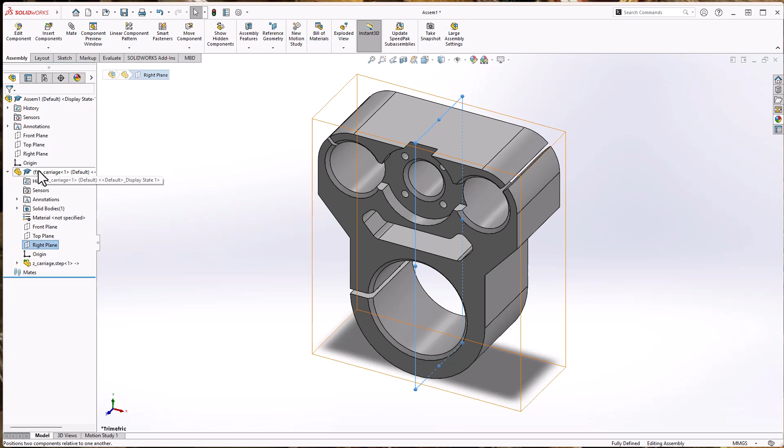So what this does, if you click the check mark, it allows the origin of the part you're placing to line up with the origin of the assembly. I think it's good practice to always do that for the first part that you put in.

When I'm deciding what part I should first put in the assembly, I want the thing that is most stationary or most normal. So now that I have that part put in, notice it also came in as a fixed component - it doesn't move in space. That's good for your first component. After that, we want everything to be related to the first component.

So we're ready to insert something else now. I'm going to use the lead screw nut. We'll bring that next, so I'll click OK. I can drag it and drop it anywhere - this will be fine.

And now that it's here, it's going to go in this pocket. So what I'll do is click this outside surface, holding down Control, I'll click the inside edge here, and I want those two to be concentric.

That looks good, and it went the correct direction. If it didn't, there was another option - I could make it flip around, and one of the other times I insert in, I'll show you how to flip that around.

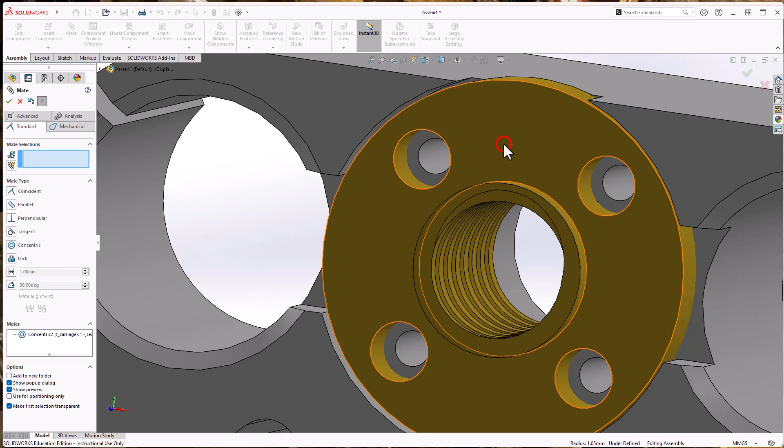Now, if you notice, what I did not do is go into the mate command. The mate command is convenient, so if we open it up, we can do things like choosing the inside cylinder of that hole and the inside cylinder of this hole here, and let the two of those be concentric. I'll click the concentric button and click OK, and that will complete the mate and finish everything out.

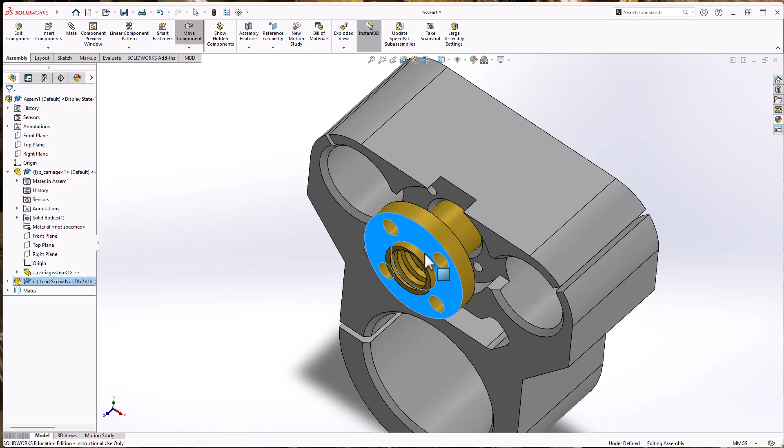And now if you notice here, oops, the lead screw nut is almost all the way locked down. Let's see why it's moving - I'll rotate around a little bit, remember that's the middle mouse button. Okay, the lead screw nut cannot rotate anymore, and it's stuck inside the correct hole, but it's not fixed at that inside edge.

In order to make it fixed, again, instead of going into the mate command, I like to use the pop-ups. So I'll click this surface, and I want this surface, and I'm going to hold down Control, these two surfaces. When I let go of Control, a menu pops up with the basic mates here right in front of me. The one I wanted was coincident.

If I don't move my mouse, I have the option to flip the mate. In this case, I don't want to flip it, but if it ever goes backwards from what you expected, you can click the flip mate alignment and it'll fix it. Okay, this is now fully constrained. I know it's fully constrained because if I try to grab it and move it, it doesn't move. Also, in the design tree, we can see that the lead screw nut does not have a minus sign next to it.

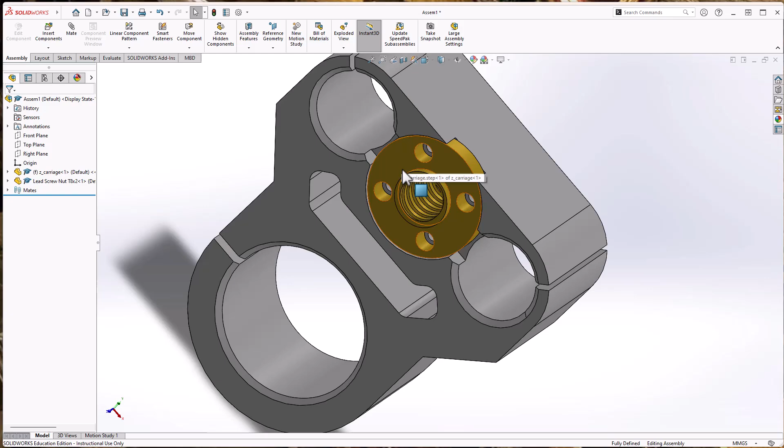That means in the assembly mode that it's fully fixed. Now that we have that component in, the other thing I want to put in here are linear bearings. I'll show you two different ones - I'm including both in your packet. One of them is one I downloaded from McMaster-Carr, called the linear and rotary ball bearing. This looks almost like the one you actually have.

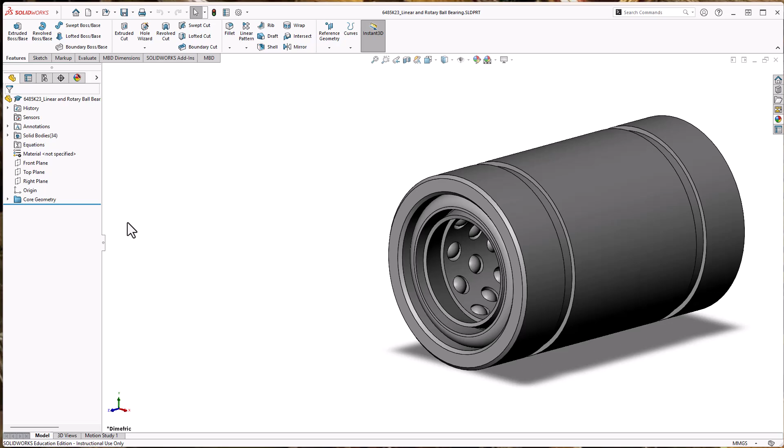Oops, I just clicked to open the part, not to insert it. But I'll show it to you here. You can see it actually has the ball bearings inside of it. This has a lot of detail - if your computer is really capable, it would be fine to use this. But it has a lot of features and is more complicated than necessary, so to keep you from having stability issues, I'm not going to use that one.

I'm actually going to use the other one. So I clicked Insert Part, and now there's one called Linear Bearing. When I open it, it comes in as just a rough representation - notice it does not have the cylinder or ball bearings inside. We want two of these, so I'm going to grab hold of that one.

I'll hit Control. In the design tree, I'll click linear bearing, Control C. Now click somewhere on the screen and Control V, and it places another one. So now I have two in the assembly.

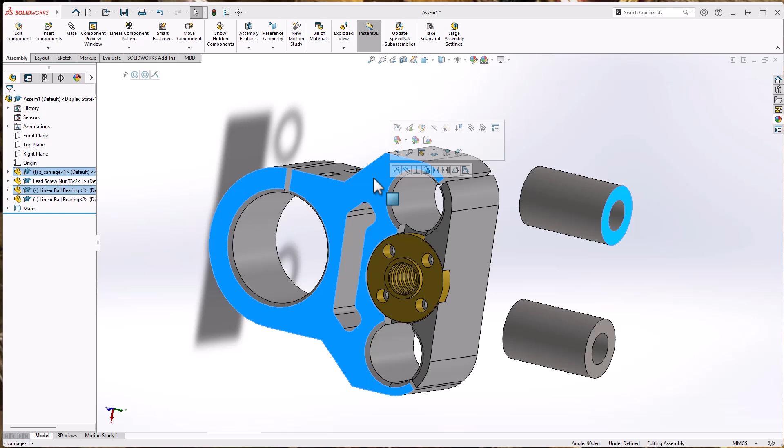I want to do the same thing I did before, inserting these in, but I'll do it slightly differently. This time I'll take this surface, control this surface. When I let go, I have the option to let it be coincident. That's the wrong way, so I'll flip the mate orientation - that's correct, so that's good.

Now the next thing I want to do is a concentric mate, but this time I want to lock the rotation. That means this would no longer be able to revolve in the hole. This one I didn't lock the rotation because I wanted to use the bolt holes to finish locking it, but this one there aren't going to be bolt holes.

So I'll click this outside cylinder, this inside cylinder, let go of control, concentric, and now I need to hold my mouse here and click the lock rotation button. Notice now the linear bearing does not have a minus sign. The linear bearing down below still does because it's not fully constrained.

We'll repeat this process. Click here, control, click here, coincident. It went the wrong way, so flip the orientation. Click anywhere to deselect everything. Outside surface, control, inside surface. When I take my finger off control, I can choose concentric and I'll choose fixed rotation. So now this is fully constrained.

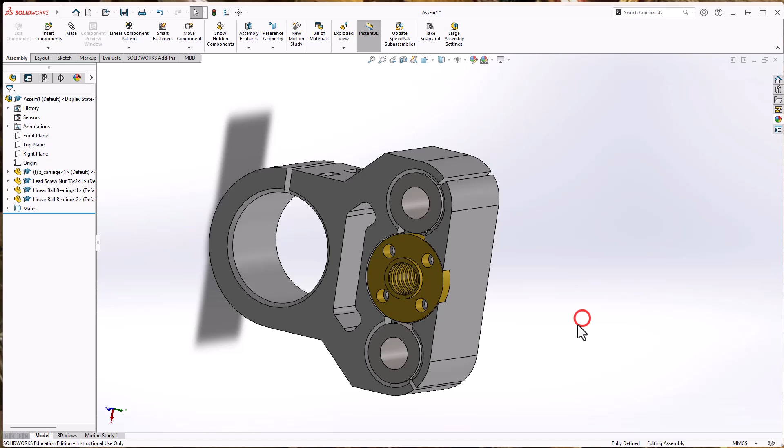So I need to name this assembly. This is all I need to do for this subassembly - this is my Z carriage assembly. I'll click Save, and I'm in the Z carriage components. We'll call this Z carriage assembly.

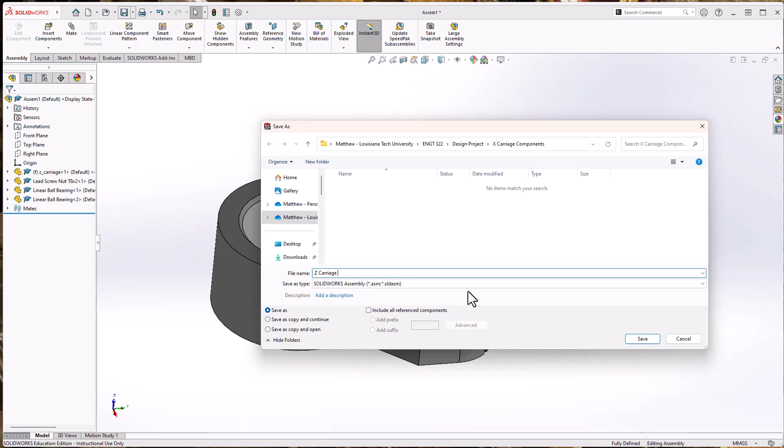One other thing we can do here just to make things look nice. Right now this has been what I would call a bottom-up design, in that I brought in one component, then another, and each of these components are independent from one another.

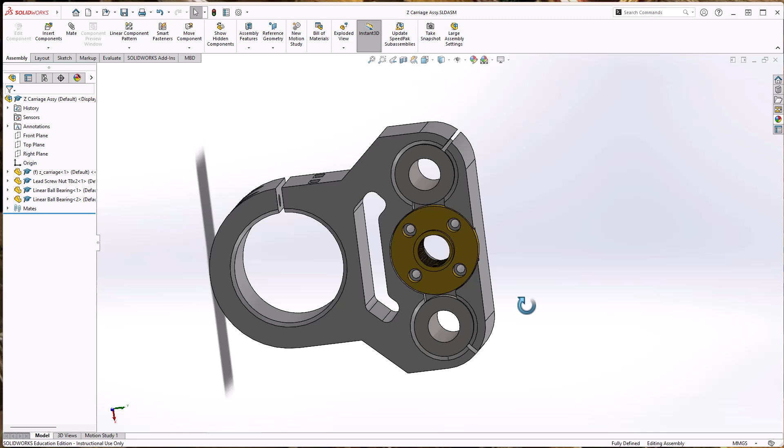In that regard, if there's ever anything I want to edit - for instance, I want to change the color of this Z carriage - if I right-click on it, I have two options: I can open the part, or edit the part within the assembly. I'd recommend, unless you really know what you're doing, to go ahead and open the part independently. It opens up as entirely just the part now. Notice yours should have all the features you needed to create your part - mine only has a step file because I imported this.

So I'm going to go to Appearances. I've already selected some things, so before I started it looked like this - you had just appearances. I'm going to choose the color appearance.

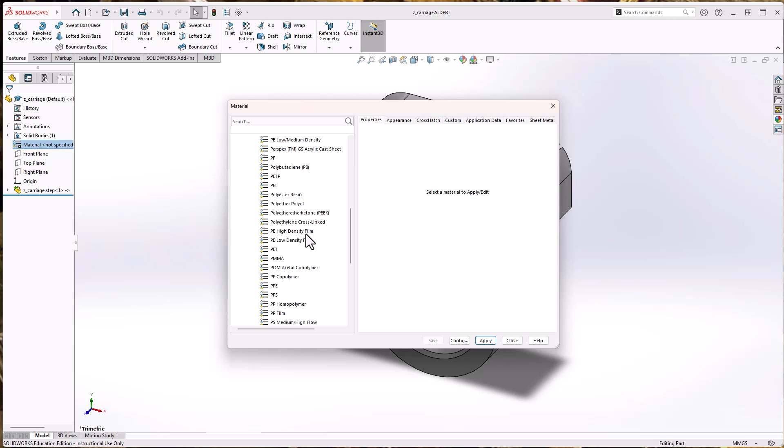I'll choose a plastic appearance. Actually, before I choose this appearance, let me change the material. I'll deselect everything and take a look at the material right here. If I right-click on the material, we can scroll down and see some common ones. There's ABS, I think that's what I'm going to use. I'll call it ABS. I know it's actually PLA, but if I go into Edit Materials and look under the plastics, we'll see that PLA isn't mentioned here at all. So I don't know how precise it is, but we'll call it ABS and click Apply.

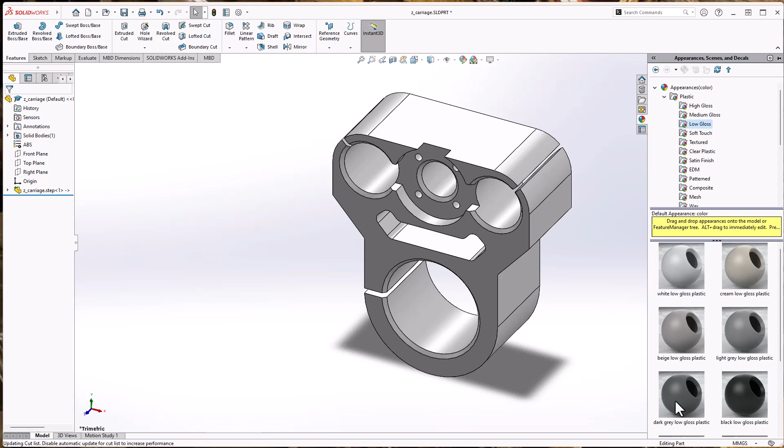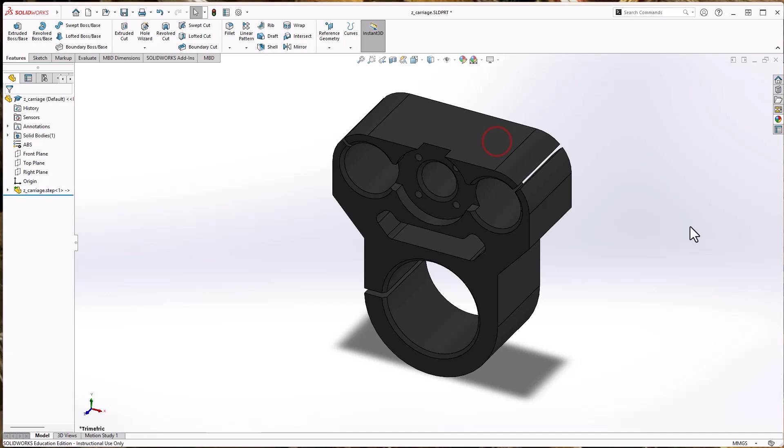Notice the color changed just a little, because there's a color associated with ABS, but I don't want it to be that, I want it black. So I'll click Appearances, go into color or plastic, and now I want it low gloss, and a dark gray. If I pull it to any surface, it'll ask if I want just that surface or that particular feature. For me it's the entire whole body, the single body - if there were multiple bodies you'd choose between one feature or the entire part. I'll do it on the part level, so we'll click here, and now black has been applied.

I'm going to click Save, Control S to save it. I'll exit just this one part, which brings me back into the assembly, and you can see the appearance was conserved, so now it's black here in the assembly. This assembly is finished, I'm going to click Save, and I'll minimize it because we're going to come back to it in a minute.

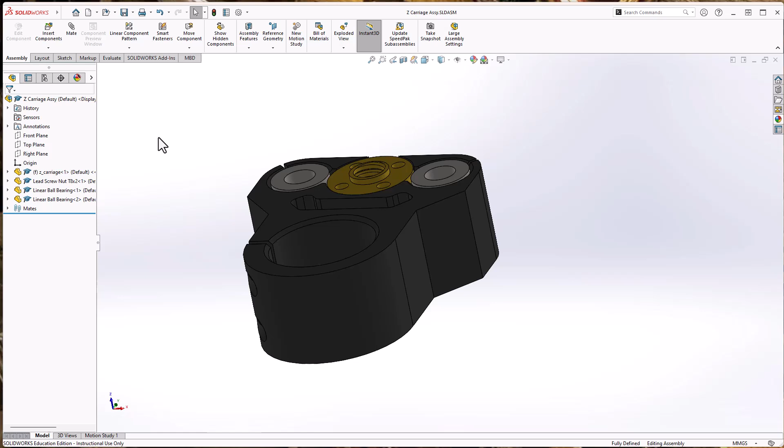The next assembly we want to create is the X carriage. I'm still in this component right now, so let me maximize it back. Here we are in the assembly. I want to go to New, and again if you're in the novice version, you're just going to click Assembly, OK.

Now if you have any files open, they'll show up here already in the Begin Assemblies. I don't have the one I want here, so I'll click Browse. Actually, what I want to insert is the X carriage, but I just remembered I've not yet created the X carriage here, so I don't see it. Let me cancel, we'll exit out of this Begin Assembly dialog and minimize it for a minute.

I'll click Open, and while I'm here, notice the X carriage is a .step file - I've done this for you so you're going to import an actual step file. You click Open, and SOLIDWORKS has to interpret the step file as a SOLIDWORKS file, so it asks if I want to run the diagnosis. That's typically a good idea, so I'll click Yes. It said there were no problems, so do I want to finish the import? I'll click OK, and now it comes in as a single solid body.

At this point I want to save. Notice the file name is now x_carriage.sldprt, so I'll click Save, and it asks if that's really what I want to call it. It is, so I'll click Save again.

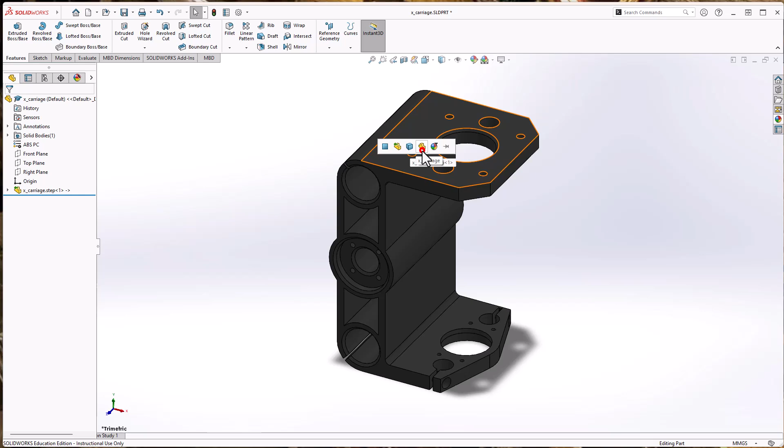We'll do the same thing for the material. Notice ABS is here, so I can choose that, and that made it clear - the PC ABS is a clear material. That's okay, we'll just choose the color here, low gloss gray. I'll drag it to a surface and choose for the whole body, and now I have a black X carriage. I'm going to click Save, and I'll leave it open again, so I'll minimize.

Now if you notice, I've got several things down here at the bottom. Here is the assembly I just started that was unfinished, so I'll click Open, Insert Component. Now the X carriage is what I want to insert, and again I'll click the check mark so the origins line up. Let's take a look at this and make sure we understand what we're looking at.

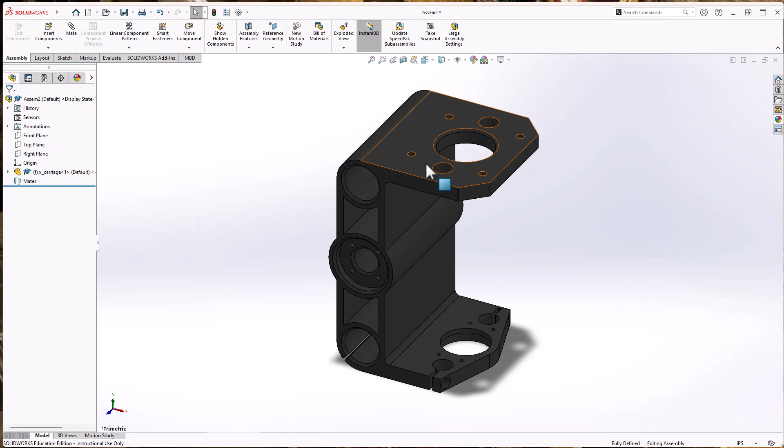It's probably easy to see that we're going to need to put another nut here, and we're going to need to put our linear bearings in those four locations. We also need to put a stepper motor, and that looks like it's going to go here. The stepper motor will stick up and let some other components go, so there's a bearing that's going to go in this area down here in the bottom.

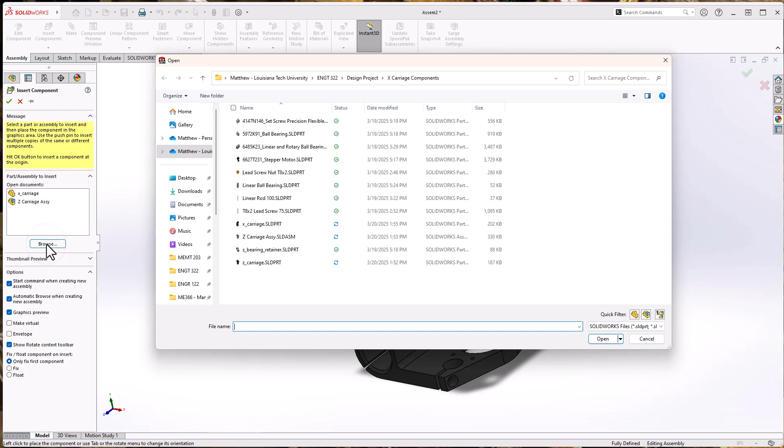It doesn't matter a whole lot what order I do things in, as long as I'm consistent. Since I've already done it once today, let me add that nut again. I'll do Insert Components, Browse. It was the lead screw nut I'm bringing in. I'll click Open, and we'll drop that there, and do it in a little bit different order this time.

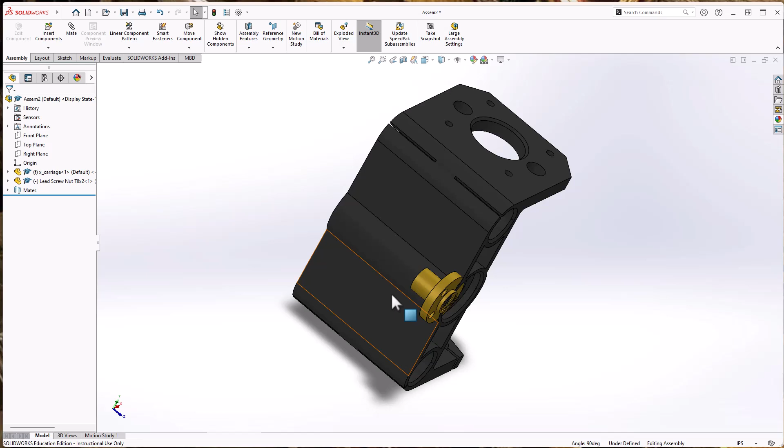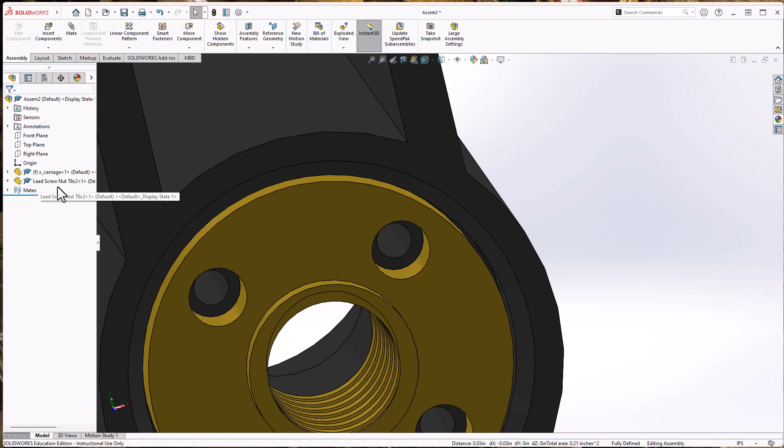I'm going to take that surface, control that surface, let them be coincident with each other. Now I can grab this surface, control inside surface, and let them be concentric, but this time I'm not going to use the lock rotation. I want that cylinder and this cylinder to also be concentric, and that will lock the rotation. The lead screw nut now does not have a minus sign, so it's fully placed.

The next one I want to show you is a different way of inserting components. We'll click Insert Component, then Browse, and use the linear bearing right here. I'll click Open, but instead of just immediately dropping it, I'm going to click the pin to keep visible. By doing that, I can now place 1, 2, 3, 4 in one motion, put them all in at the same time. We'll click OK, and now I just need to go through and do each of these.

Surface, surface, coincident, switch. Surface, control, surface, concentric, lock rotation, and repeat. I took care of those two.

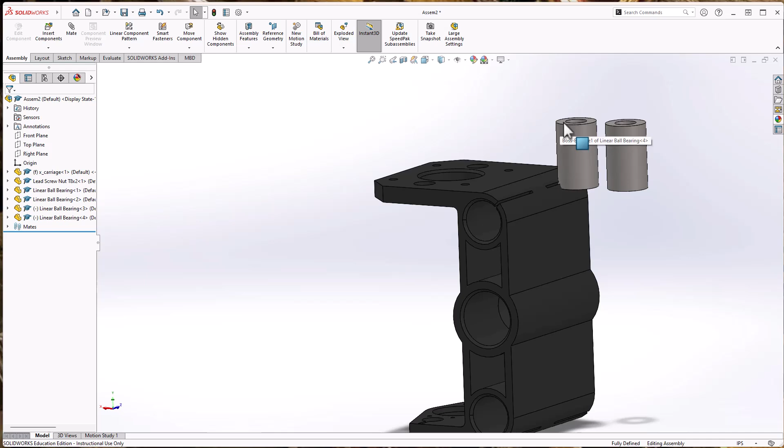Now I'll rotate around so I can see what's going on here at the back side. Notice I was careful not to get the lines. I don't want edges, I want surfaces.

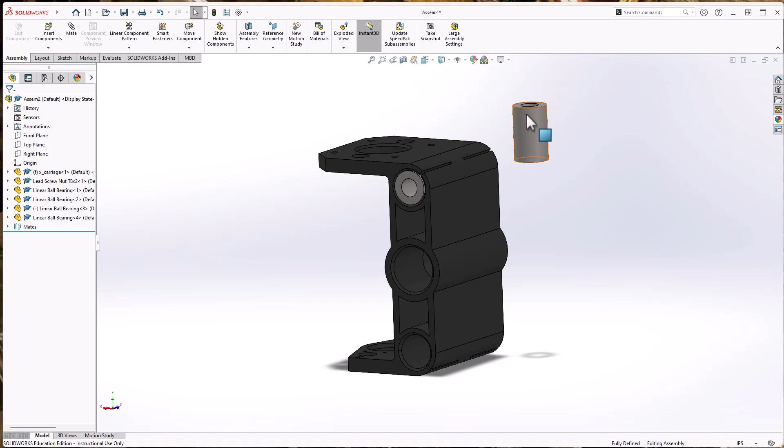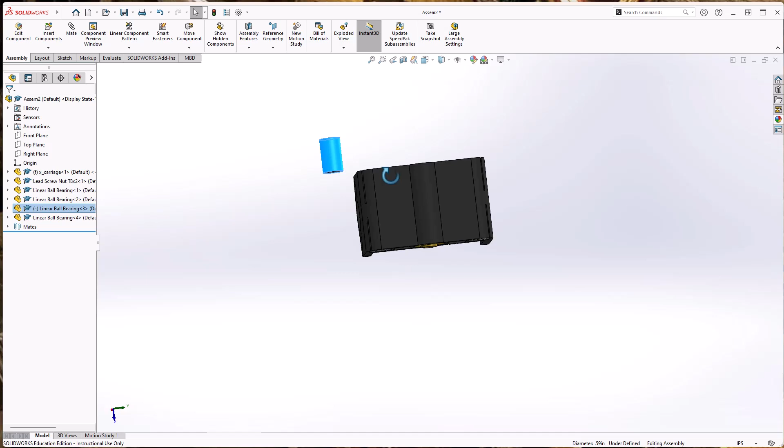Sometimes I will forget to do something, so let me do it incorrectly this time. Let's say I click the surface here, control, click the surface here, and I'll click coincident, but then I'm not going to switch it this time. I'll just click somewhere. I forgot to switch that, so you notice it's mated, but it's in the wrong position. If I drag it and move it, it's still staying in the same plane, but it's the wrong way.

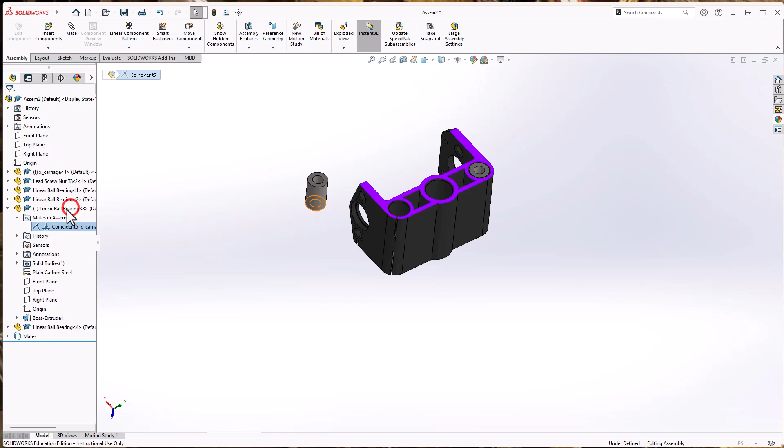I want to flip that mate. What I need to do is first find which one is moving. So this is the component that's moving. Over here we can see it, so I'll expand and look in its mates, find this coincident mate right here, and edit that mate. We'll go into the edit menu. What I wanted to do was make it flip the other way. If you look at the mate alignment here, this is what I currently have where the faces are opposing each other. I want the faces to be the same, so we can go ahead and click it there. That took care of it. We now have it fixed.

The same will also be true for locking the rotation. If I click this surface, control, click this surface, and I'm going to forget to do... actually let me hit escape, so I wanted to get out of the mate command completely. I'll click this surface and concentric. Remember, if I forget to do that lock, all I need to do is go find that concentric mate. I already have it pulled up.

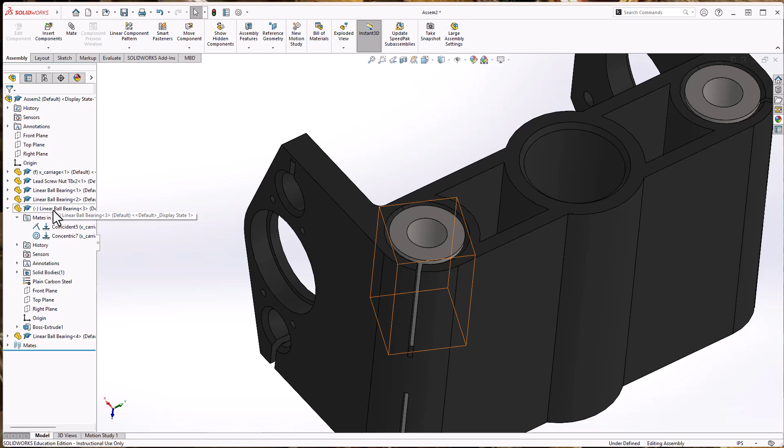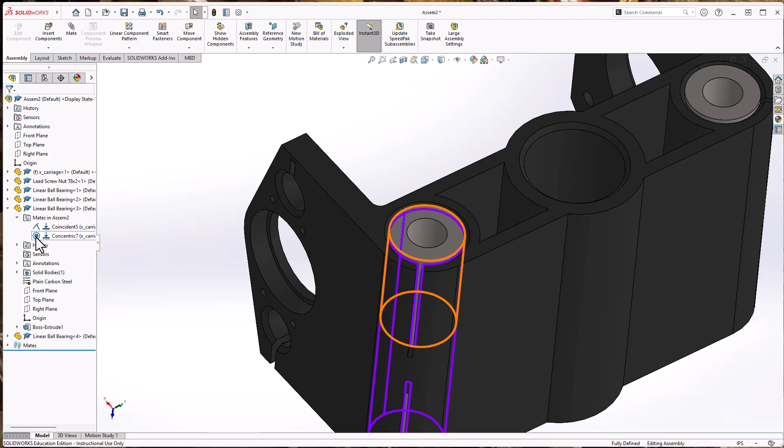There's the linear bearing expanded, and you can see the mate where they're coincident, and underneath it the mate where they're concentric. Notice this does not have a solid filled in inside, meaning we did not lock rotation. If I right click on concentric 7 here, the first option is lock rotation. The symbol changes to where it's bubbled in and the minus sign goes away, and it's now fully constrained.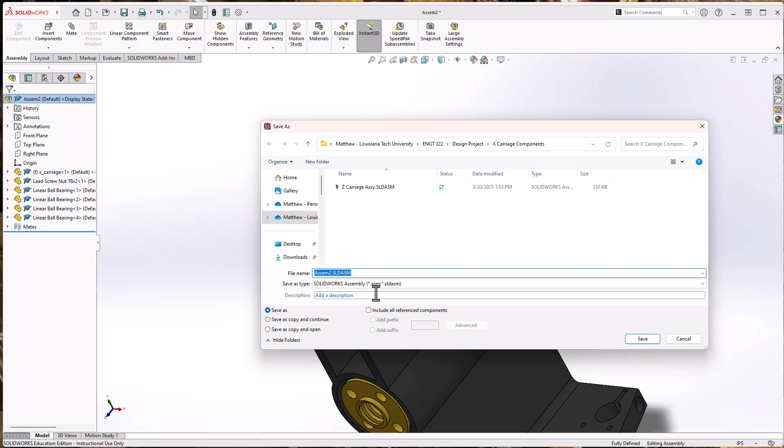So we've got those 4 linear bearings put in, and we also have the lead screw nut placed in there. That looks good. The next thing let's tackle is the stepper motor. I've already saved the stepper motor for you as a SolidWorks part. Let me save — this is probably a good spot to save, and we'll call this X Carriage assembly.

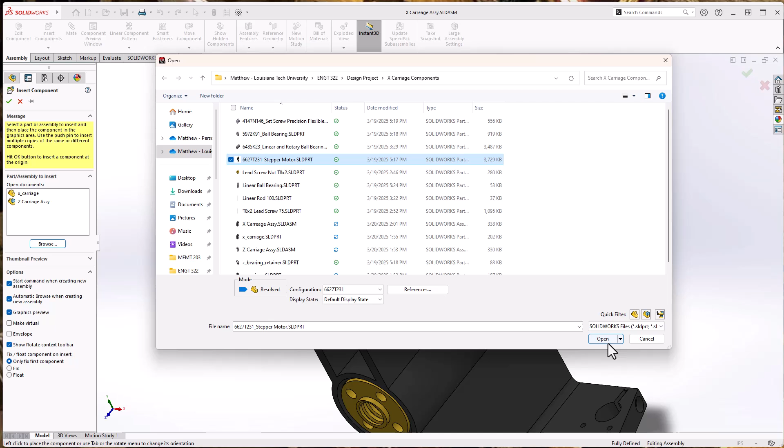We are going to insert components, browse. Let's find our stepper motor. There it is. By the way, all of these that have numbers in front of them were downloaded directly from McMaster-Carr. It's a really good source for getting good CAD files for things that you would purchase. I didn't have to buy the motor from McMaster-Carr in order to get their part to dimension.

Okay, this looks very similar to what we've done before. We'll take this surface here, control this surface, and let the two of those be coincident with one another. And then we'll let this inside cylinder here be concentric with this — I'm hitting control, this inside circle. Oops.

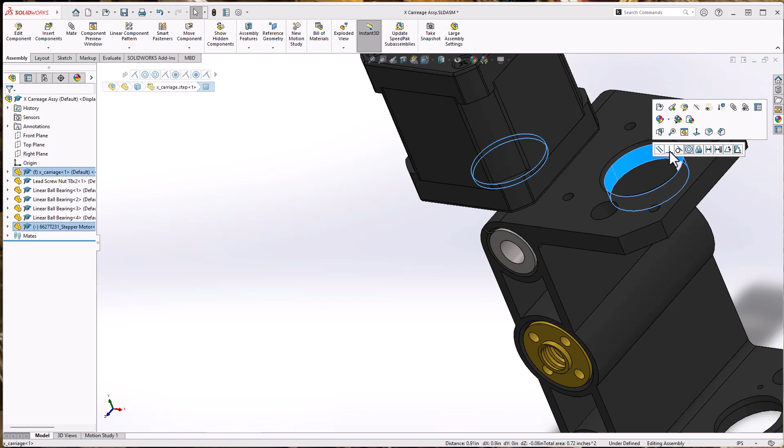Okay, now let me make sure nothing is selected. If I drag the stepper motor, we can drag it all the way around. The way we want it is for the wires to be in the back. So I'll take this surface, holding control, and this surface, and we'll use the perpendicular mate to make them line up.

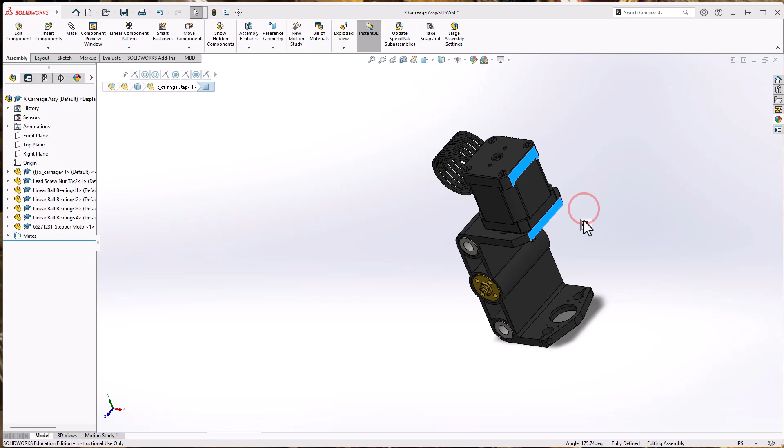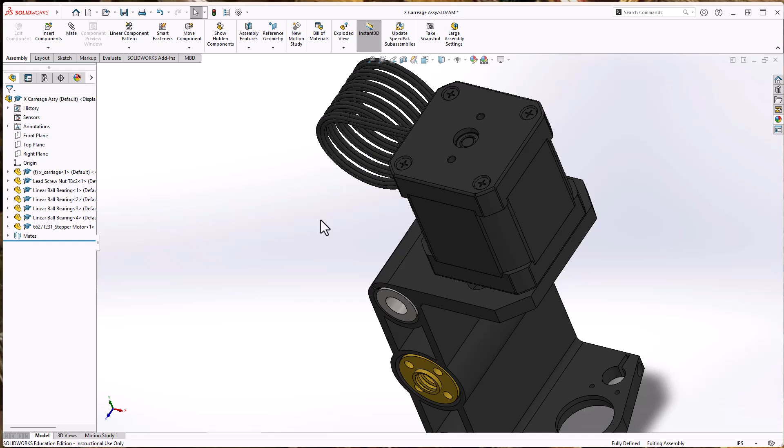That fully mates it. Now, although the stepper motor is actually an assembly, and you can see little bolt pieces, screws, and things like that, SolidWorks views it as a single part because that's how it came in. So there's no assembly components to it, which means this motor shaft is not capable of spinning.

The next thing I want to do is put the coupler on the shaft, but we need to leave a degree of freedom so the coupler can still rotate about the shaft. So I'm going to go to Insert Components, Browse.

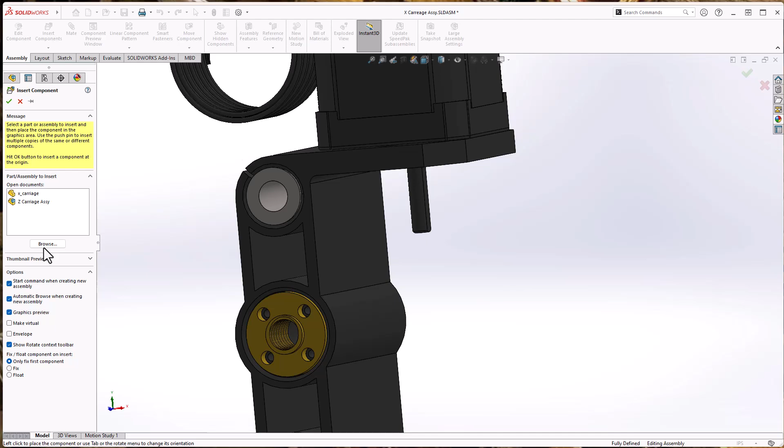This one right here is not fully visible, so we'll drag it out so you can see it. This is the flexible coupling, flexible shaft coupling, SolidWorks part. We'll open it. This one's made out of aluminum, so it's already modeled as an aluminum component. I'll drop it in here in space.

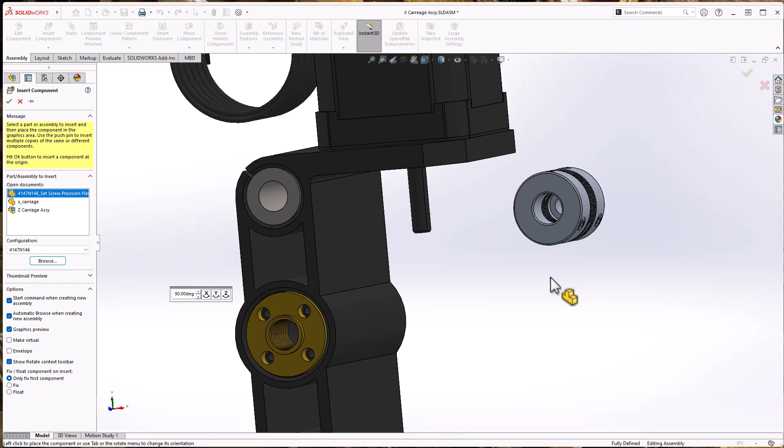You can see that the diameters are different on the two edges. That's because one of them is for the shaft and the other is for the lead screw that we'll put in just a minute. Let's go ahead and get this one assembled where we want.

I think what I want to do is assume that we're going to put the lead screw in - this entire component here will fit, that narrower section will fit on the shaft.

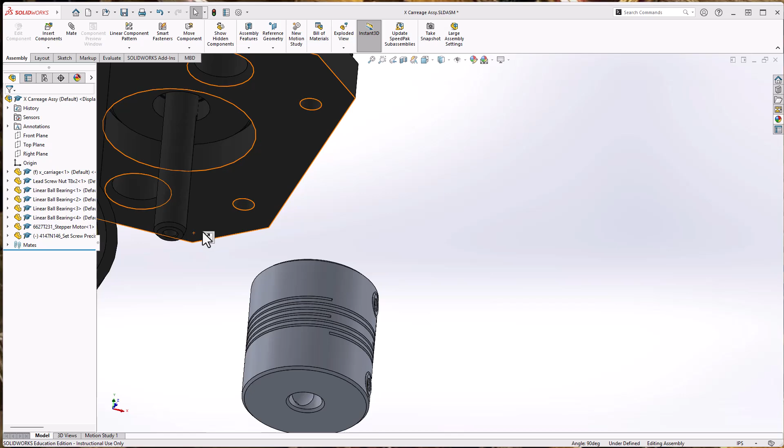So I can take that face right there, holding control, and let it be coincident with this face here. We'll let those be coincident. That's the wrong way, so we'll flip it. That's the right way.

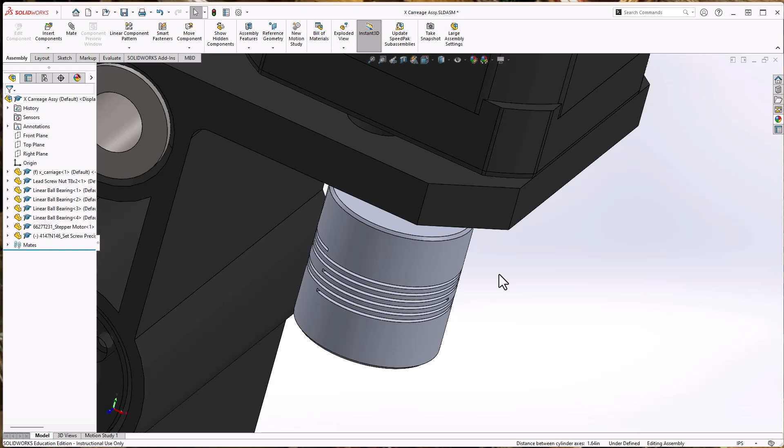Now we can take this inside cylinder and this cylinder face here and let them be concentric. And now I'm not going to choose to lock the rotation, because I actually want this shaft to be able to rotate. So if we grab hold of it, we can move it around. That's what we want, one degree of freedom.

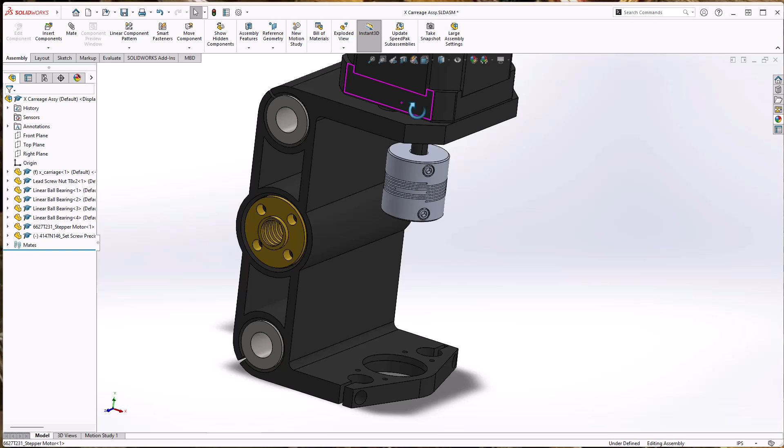Okay, good, that finishes putting that component in for now. We will eventually get to where we are controlling that motion, but for now we'll let it move. Let's go ahead and insert another component.

This time I'll get the lead screw. We've got the lead screw nut, so now I need the lead screw. It's a T8 by 2 lead screw, 75 millimeters long. So I'll click Open. This brings in that threaded rod.

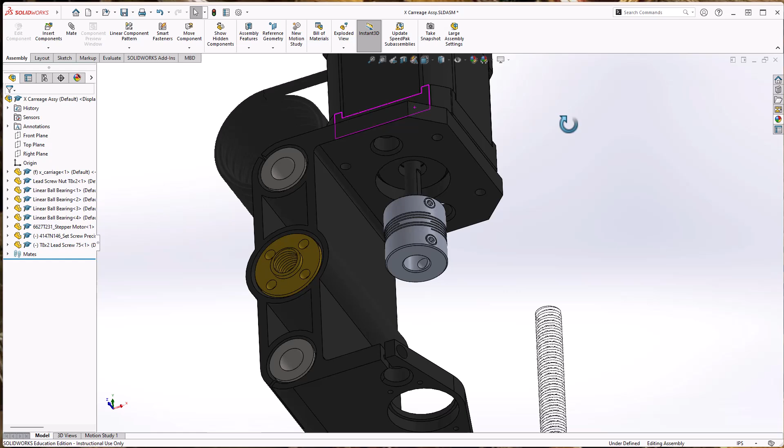Make sure that is the surface I wanted - it is. And I'll click the end here, holding down Control, and click the surface. Now instead of coincident, I'm going to choose distance. So we'll choose a distance mate, and it assumes the current distance is what we want.

That's in inches - let's change this to 2 millimeters. As I do this, I realize this particular assembly was never switched over to being in millimeters, so I do want to fix that. The standoff distance is at 2 millimeters, so we'll click OK.

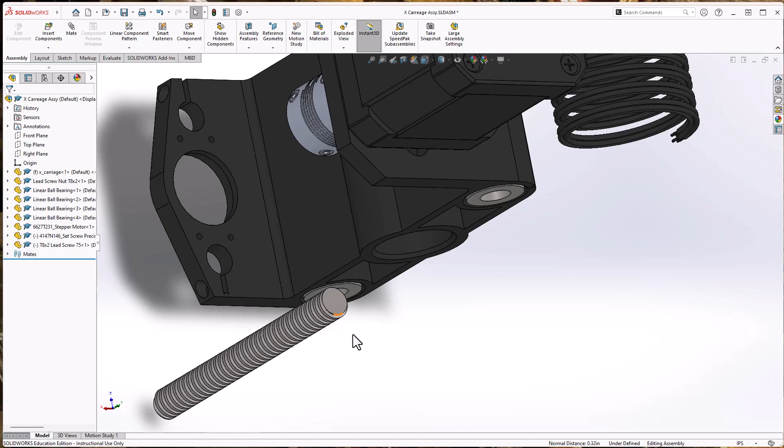And now let's save it and change the units to millimeter gram second. I'm going to choose this cylindrical portion on the outside. Rotating around, I'll choose the cylindrical face here, with Control selected for that.

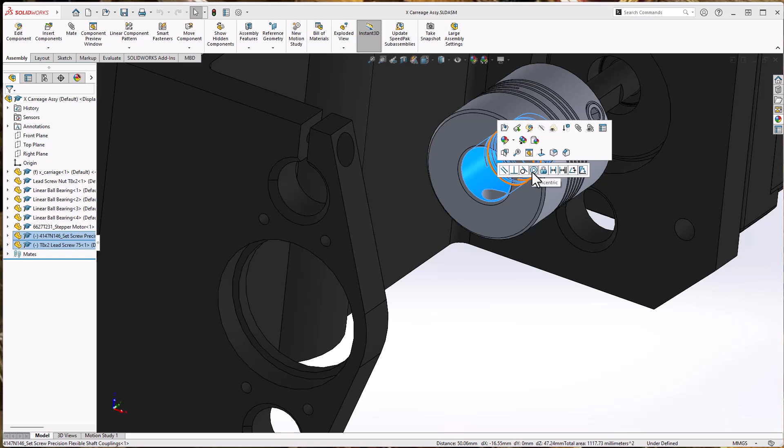We'll do concentric, and now I actually do want to lock rotation. What that means is, if you notice, there's a minus sign next to the T8, the lead screw, and the coupling.

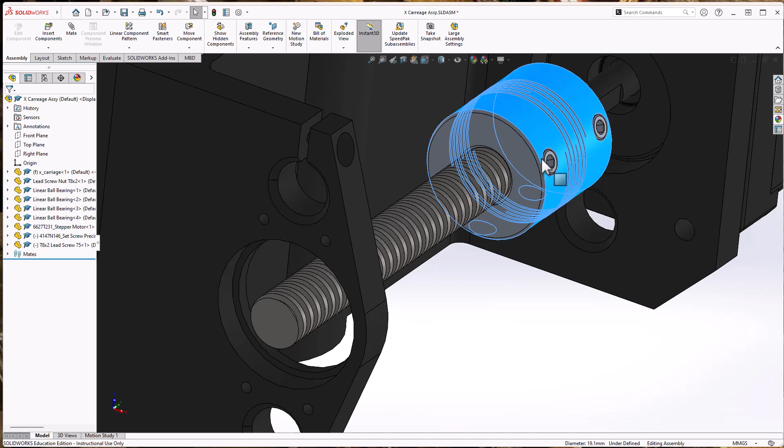If I grab the coupling and rotate it, the lead screw rotates with it. So this is simulating what it'll be like to tighten these set screws down onto the lead screw, for the motor to be spinning it. Now the motor won't ever actually really be able to spin, because that shaft is not a separate component from the rest of the body of the motor. So we really are just simulating what it would look like.

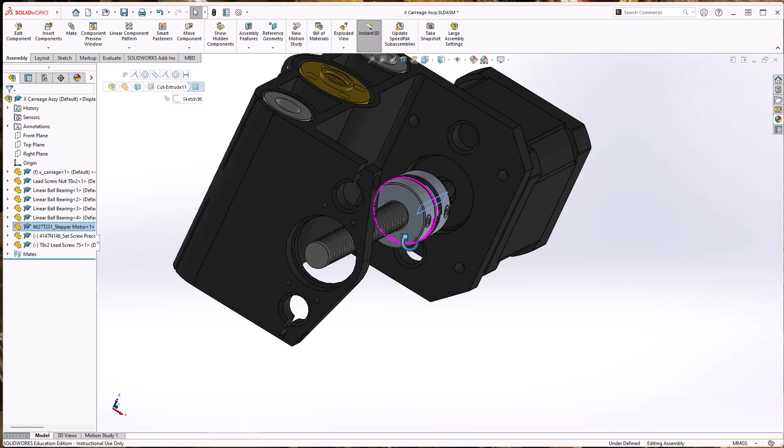Okay, the lead screw comes down here into a bearing housing. Let's go ahead and put in the bearing. So we're going to insert components, browse. This bearing, a ball bearing, came from McMaster-Carr. Again, this comes in very nicely. It's been set to steel after it was saved as a SOLIDWORKS part. You can actually see the race in there. This doesn't look exactly like the bearing that we have, but dimensionally it will work.

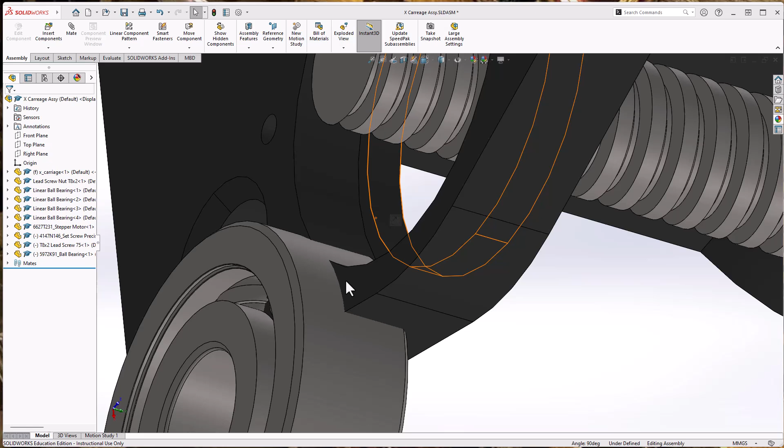So we'll choose this inside surface, control that surface, coincident. That is the way I wanted it, so that's great. This surface, control this surface, concentric, and lock rotation. Looks good.

Okay, there's a Z bearing retainer. I've already converted this one to a SOLIDWORKS part for you. This one is called Z bearing retainer. Open.

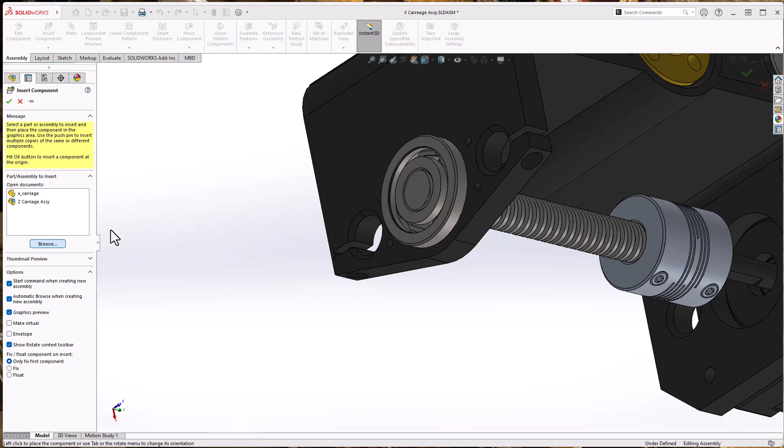Oops, I opened the part instead of inserting it in the assembly. So let's try again. Insert component, browse, Z bearing retainer, click open.

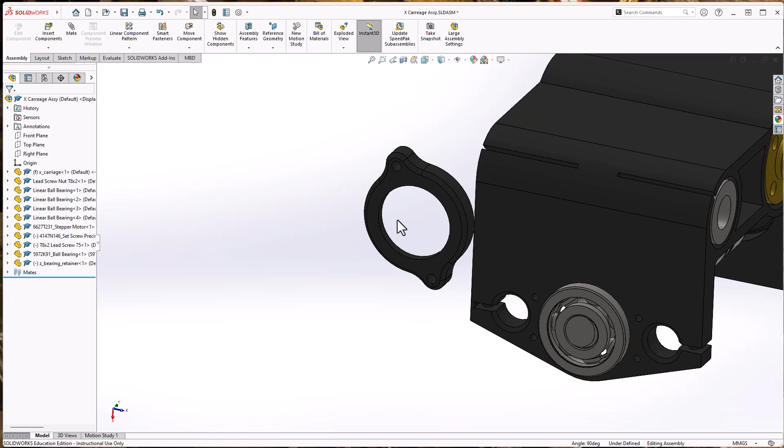Here, okay, rotate around so I can see its orientation. There we go. Okay, that surface right here, that surface needs to be coincident with that surface. This cylindrical face should be concentric with this cylindrical face. And this hole and this hole should be concentric. There we go. Got it rotated around.

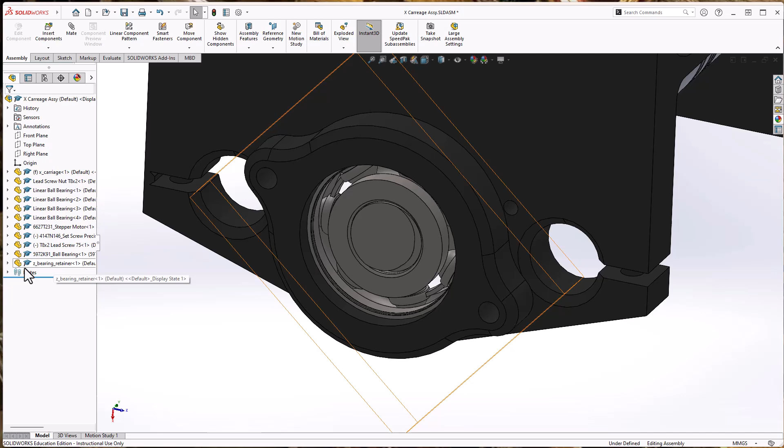Notice the Z-bearing retainer doesn't have a minus sign. It really is good practice. This is still a bottom-up assembly design because we're bringing in pieces one at a time that were created independently. But at this point, it's handy to notice that the only motion we're going to allow is this screw right here that can rotate around.

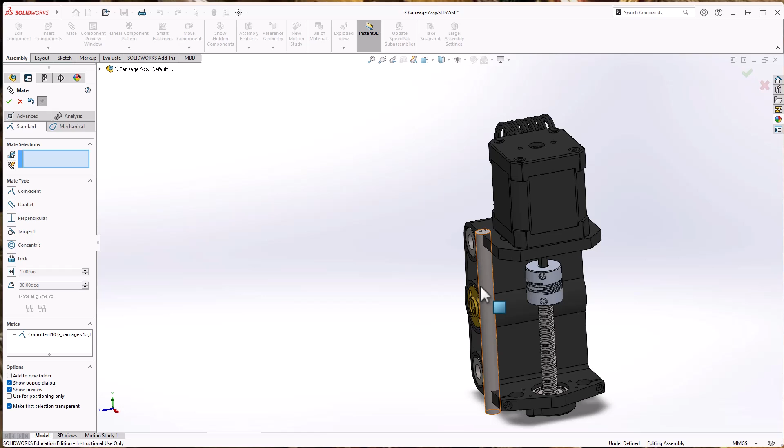So we'll go ahead and insert this one. We're going to mate. I'll choose that surface and this surface, and we want them to be coincident in the way that they're currently located, so click OK. So I did actually use the mate command this time. Since I'm in the mate command, we can click this surface and this surface. And here's the lock rotation if you're using the mate command instead of shift selecting surfaces. So we'll click OK. That's finished.

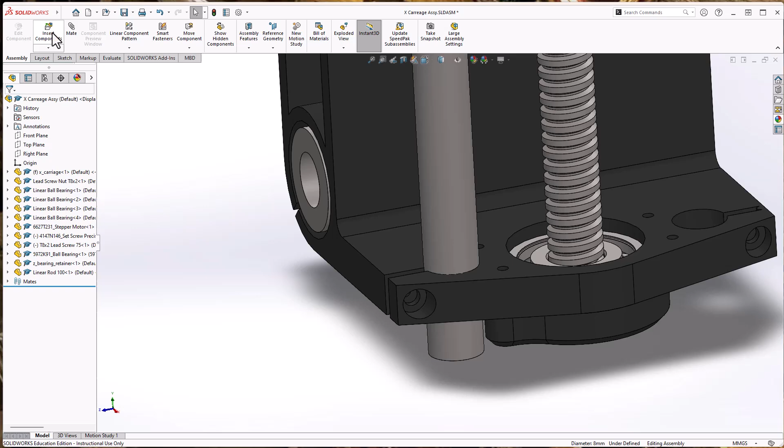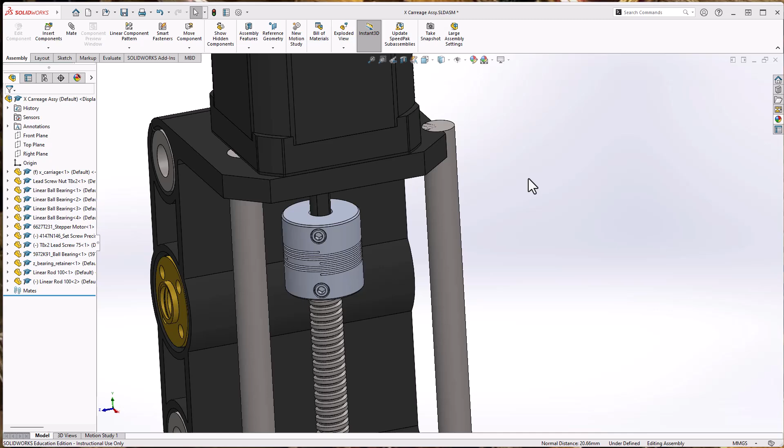That finished the linear rod. Let's put in another linear rod. So insert, browse, another 100 millimeter linear rod. Drop it in. This surface and this surface needs to be coincident. Good. This surface and this surface needs to be concentric, lock rotation. So that fixed that one now.

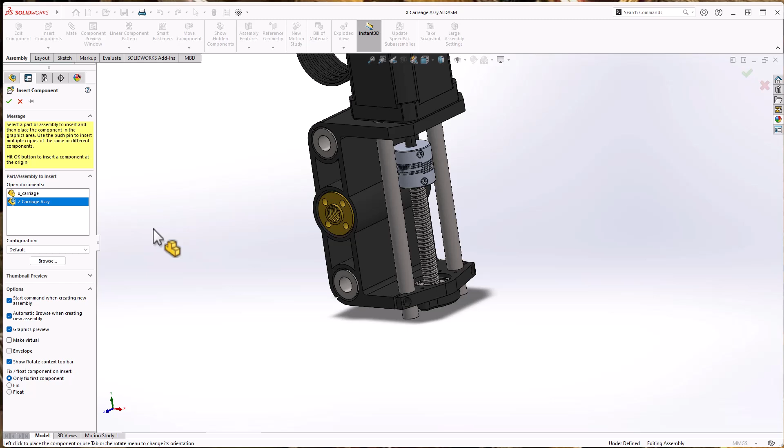It's fully locked. And the only other component that we have left is a subassembly, so we will go ahead and drop that in. So we'll save, then insert components. And now finally I'll use one that I already had, the Z carriage assembly. Let's bring it in. There it is.

And the way I put mine in, I actually put it where the bearing was facing upwards towards the nut. So we'll do the same thing. That means that this and this were concentric. And let's check to make sure we got that right.

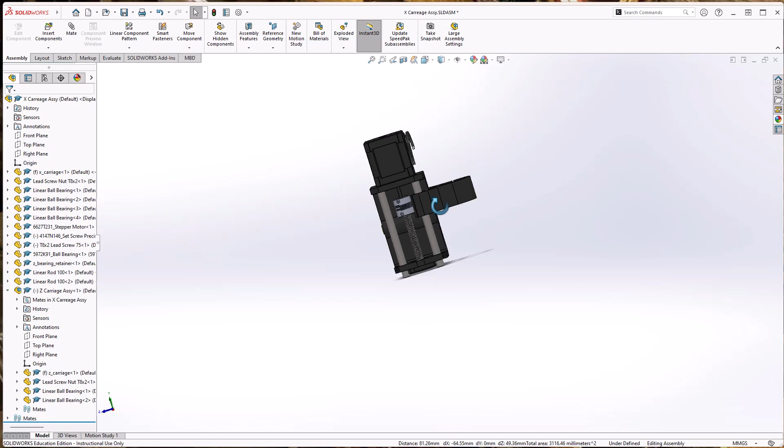Oh, no, it didn't do it the right way. So I'll expand the mate over here, and I'll right-click on this concentric mate and edit features. And we can flip the mate alignment. So that put it the direction that I was hoping it would be. So click OK. Click OK again to get out of that mate command.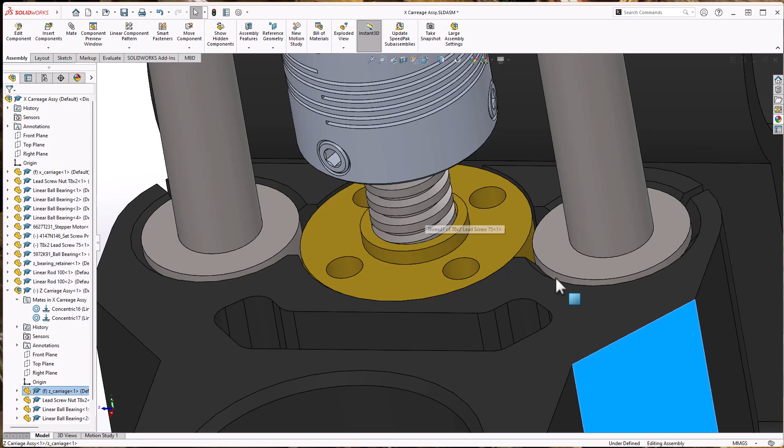Then this surface and this surface will be concentric. Okay, and now this can move up and down. Now, we can get into a little bit more precision than I'm really willing to do. I did take the trouble to actually model the helix, which I don't always do when I'm doing something like this. Very often I would have made just this shape right here and just labeled it as being a helix. But it wasn't very difficult to add that, and I wanted to be able to see.

What I'm not going to do is try to line up the threads in here to make the two of them work correctly. What I am going to do is I want this to move up and down like it's supposed to, and I want this to rotate as it's moving up and down. I also want to limit this so I can't put it in a position that it's not physically capable of.

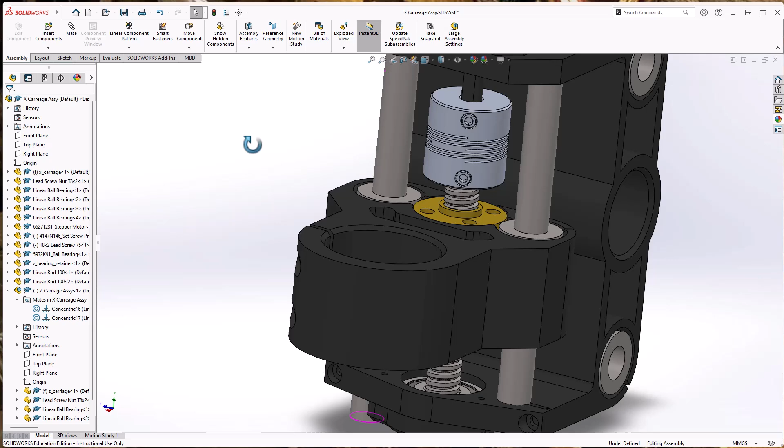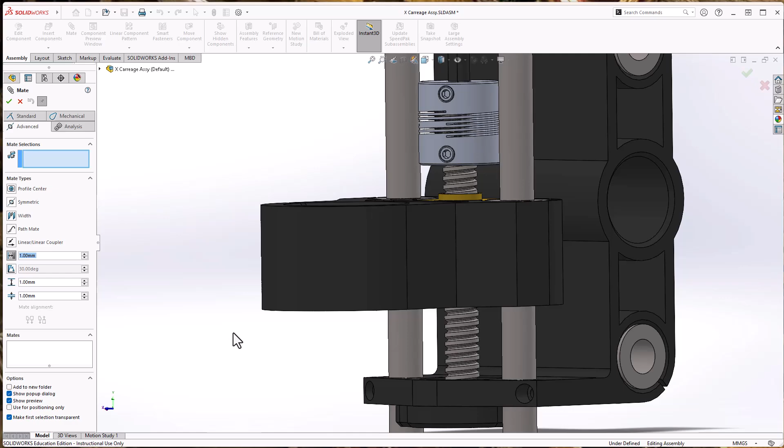So in order to do that, I'm going to actually go into the mate commands and we'll go from there. We're going to use two different types of mates. We're going to go to the advanced mate tab and we're going to use this one, called distance. If you notice when you click on it, some new values come up here. What we want to do is use this surface and this surface.

Okay, I want the minimum distance that it's allowed to be is 0, and I'm not sure yet what I want the maximum to be, so I'll show you how to change it. I think I'm going to make this be maybe 15 millimeters for now, and we'll need to come back and change that later. But I want you to see what this is doing. This is called a limit distance.

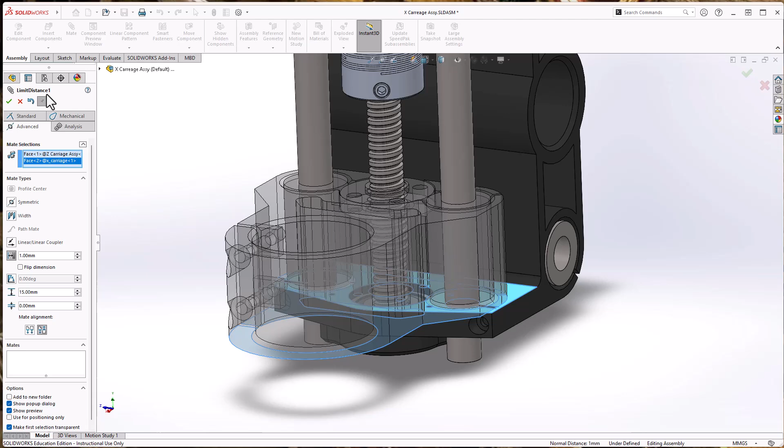I'll click OK. And if I grab this to move it, normally when I'm trying to see if something will move, I'll look for a point I can grab. So I'm going to grab this point right here. I can come up 15, and if you notice it stops, it won't let me go up any further. And when I go down, it will stop and not let me go any further. So I can go between 0 millimeters and 15 millimeters at that distance.

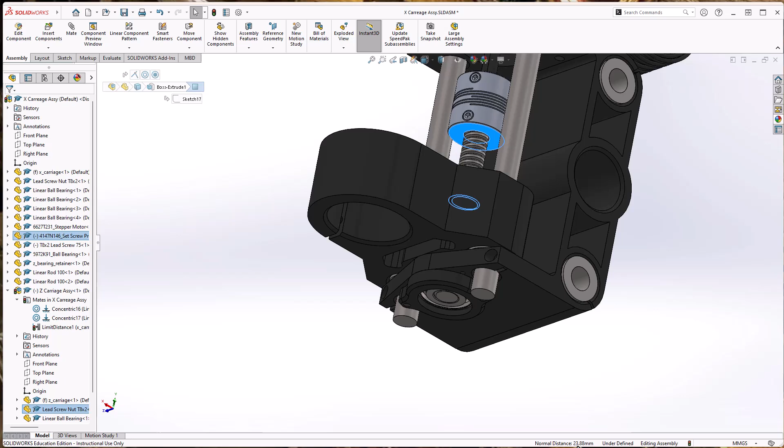So what I'll do is I'll put it all the way down to the bottom. I'm going to click OK so I get out of the mate commands. And what I'd like to do is know how much it can go up before this component right here, so I'll click on it, hits that component right there. If I hit Control and click, so those two surfaces are connected, down here at the bottom it actually gives me the distance, and it says that 23.88 millimeters is the distance from that top of the gold or bronze face to the bottom of the aluminum face.

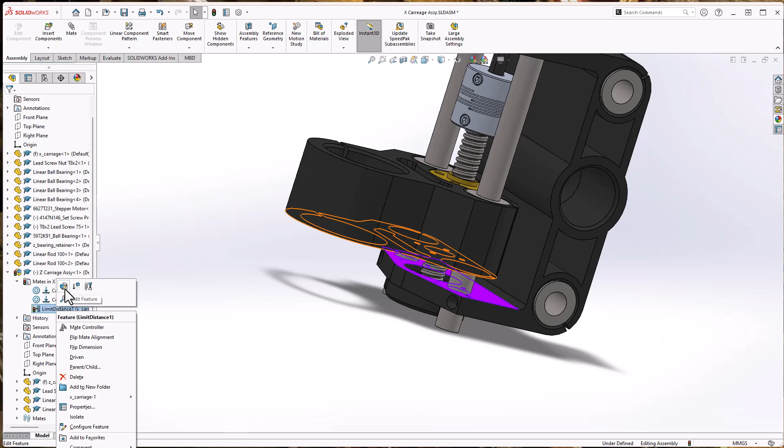Now that I know that that's 23.88, I'm going to call it 23 millimeters. Let's go back to this limit distance. So the Z carriage is the thing that can go up and down, that's this. And I'm going to edit this limit distance, edit that feature. And instead of stopping it at 15, we can stop it at 23 millimeters. So we'll click OK.

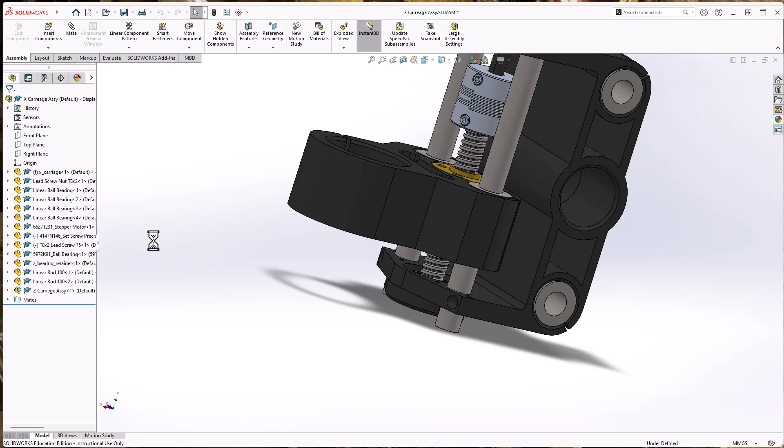Whenever you see the red light, green light, that means it's possible to rebuild the assembly. Let me click the rebuild button. And if you notice the Z carriage, even though it's still capable of moving, the minus sign is now gone from that side. Let me rebuild again. It's allowed to move, but we have constrained that axis, so SOLIDWORKS understands that we're letting it move the way that we want to let it move.

I've got one more mate I want to put on, and this is just to be a little bit fancier for display purposes. I'm going to go back into the mate command, and instead of advanced this time, we'll go to mechanical mates. And the mechanical mate I'm interested in is the one that's called the screw.

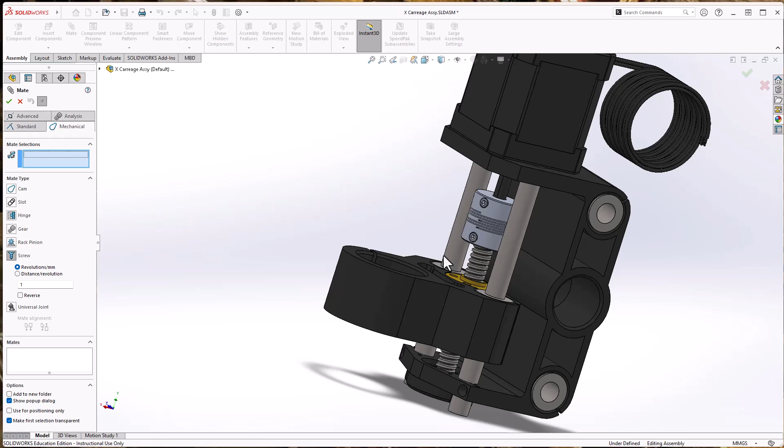What we need to do is find something related to the thing that's rotating, so I'll choose this edge here. And maybe if we can find some round edge on the stationary part—this is a stationary part—so that edge would work. Okay, so it shows now that there's some relationship between those two. I'm going to change it to distance per revolution, and we want it to go 2 millimeters for 1 revolution, that's the pitch on the screw. So that'll make it move correctly. I'll click OK, that accepts that mate there.

Now when I drag this up and down—oops, let me get out of this mate command. Let me rebuild. Okay. One thing, now that I've added that relationship, notice the two things that had rotational movement—there's one of them, the minus sign is gone. This is actually fully defined now.

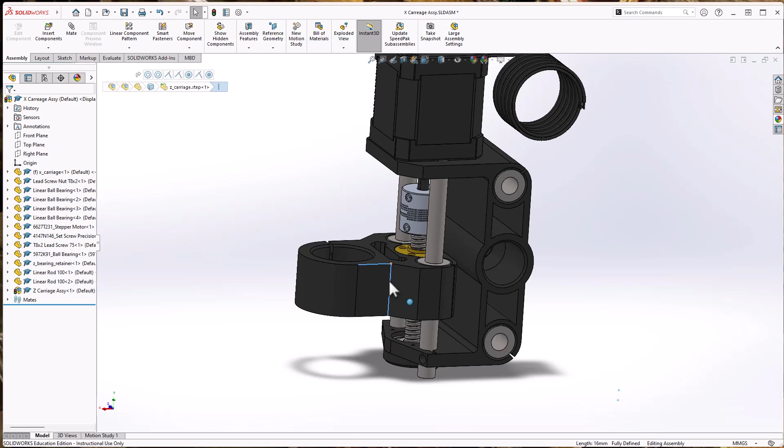If I grab this point right here and move it, it should have allowed motion. So let's see what's going on with that screw. Oh, I know what's wrong. When I chose the things that could move, what I needed to show was the thing that was rotating and what it was rotating relative to. So let me edit the screw and fix that.

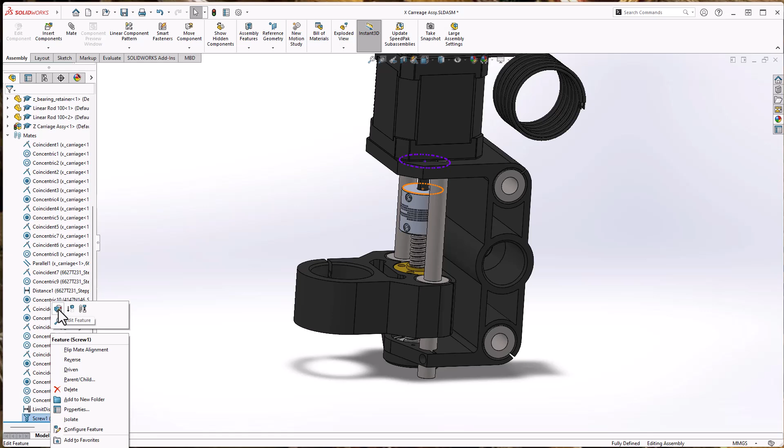I'm going to edit the feature, and the thing that was wrong was this edge 2, this top edge that I clicked second. I'm going to delete it. Nope, that was the right one, so let me reselect it—it's the top one here at the X carriage. I'll delete that one, and instead of that one, let's use something that's round on this side. Here we go. And click OK.

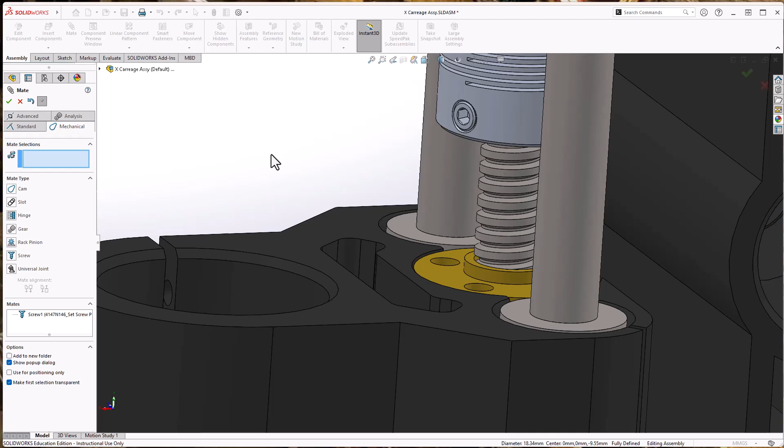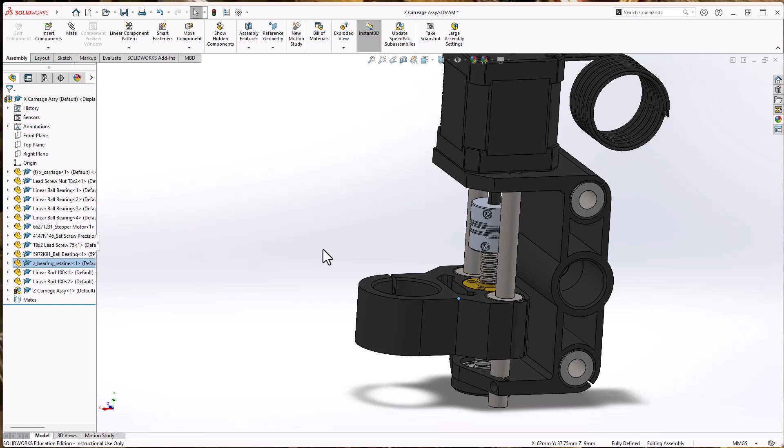And OK. Now when we move up and down, the thread rotates. Again, even though this coupler is allowed to rotate, since SOLIDWORKS knows that I've given it a mate to control it, it's considering it to be fully defined. And this finishes off our assembled component. Click Save, Save All, Rebuild and Save, and we are finished with our assembly.